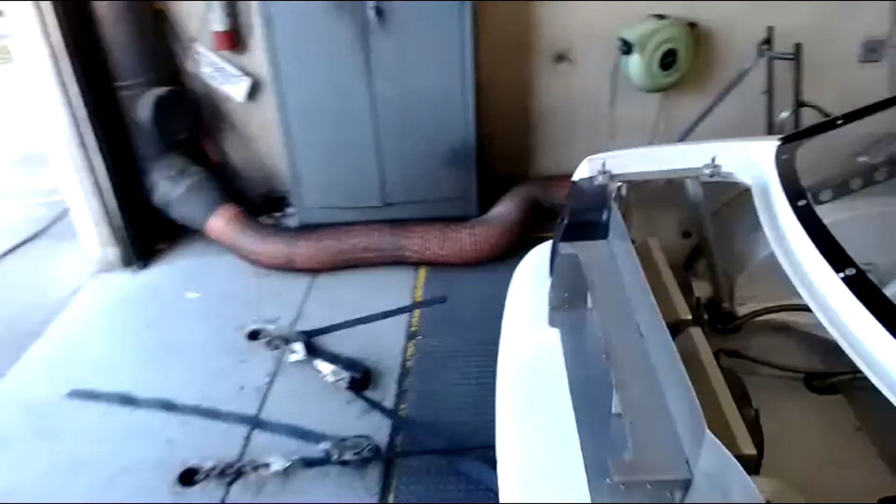Yeah, Ish throwing the tune on her. So you guys can see... oh, I can't see, oh there we go. Can you see there? Was I in your way? That's how it always is.

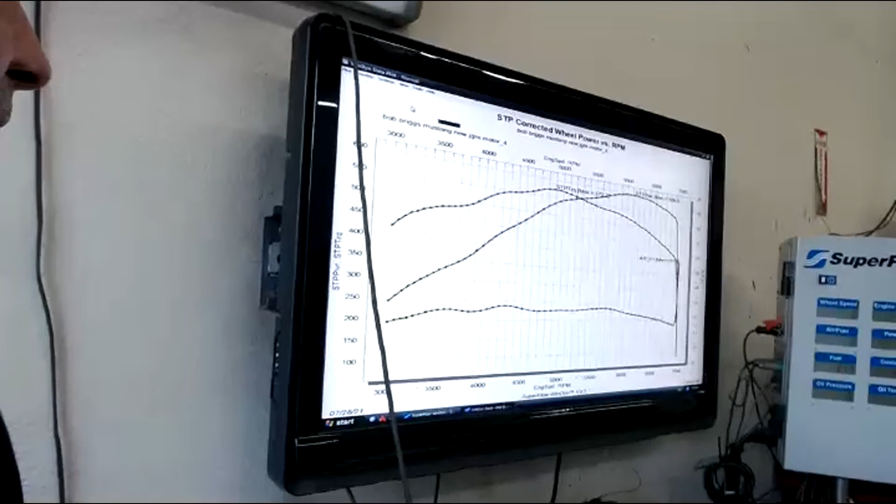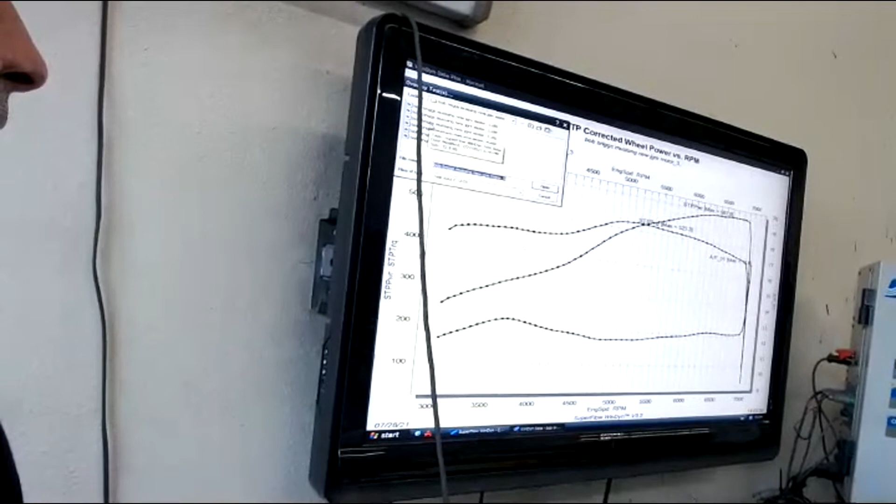This is with the short runner. And the long one. Oh no, sorry, it's a little more of a difference than that, huh? Alright, short runner versus long runner. There we go. Okay, now you guys can take a look at it, see.

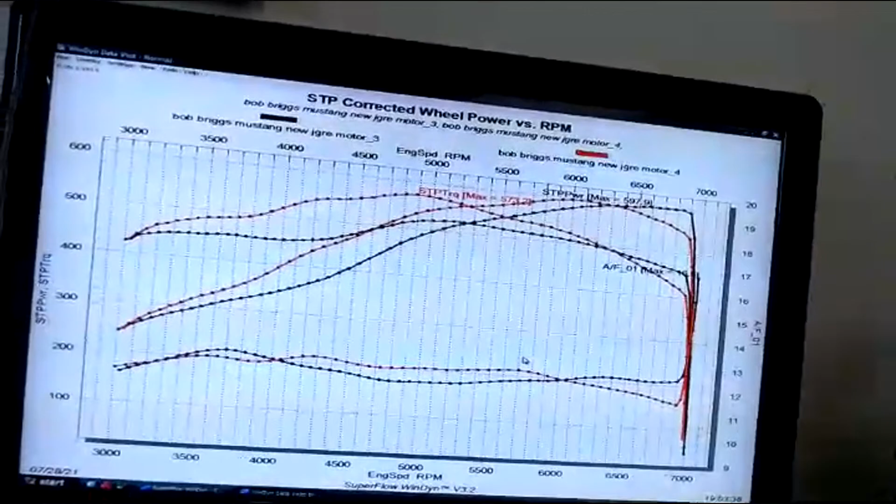So the red is the long runner, the one that's making an awful lot more torque, all the way out to, as you can see, all the way out to 6,500.

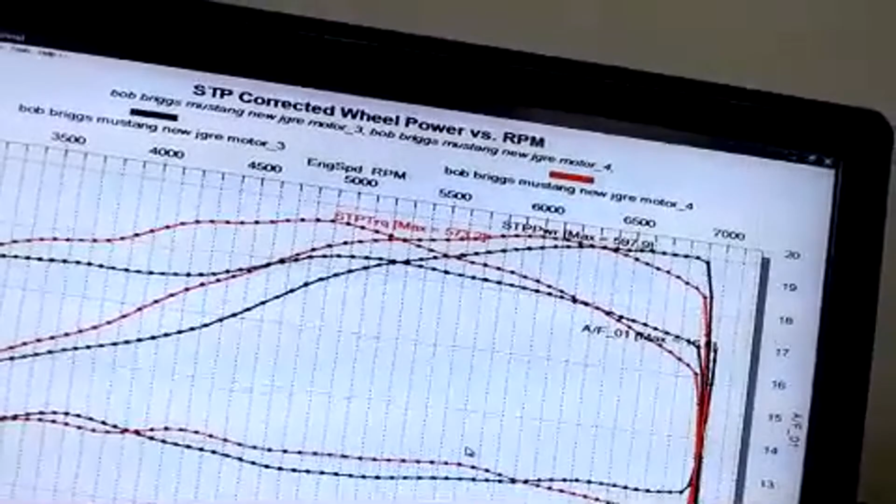The short runner did make more power from about 6,400 or so on out to 7,000, but the peak was really not changed that much. They were within 1 or 2 horsepower on the peak. It's just that as the long runner started falling off out to 6,900 or so, the other one continued.

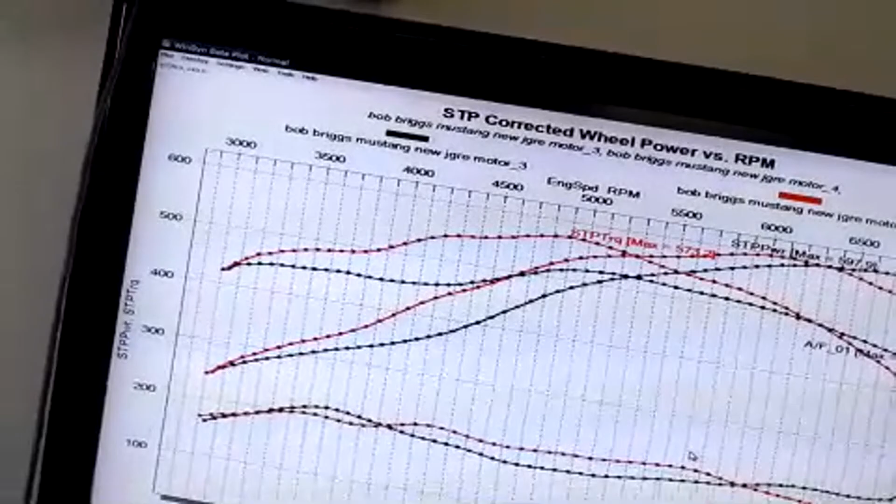But look at the trade-off. This is kind of what you'll see if you take a look at any of the videos I have up where we've run this FAST manifold with the adjustable runners on it. The long runner versus the short runner, it's really hard to beat that runner length up to 6,500 RPM.

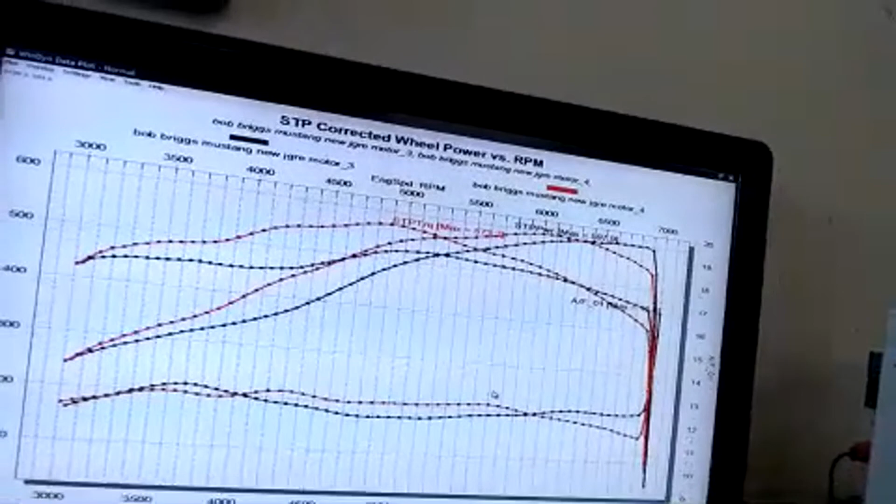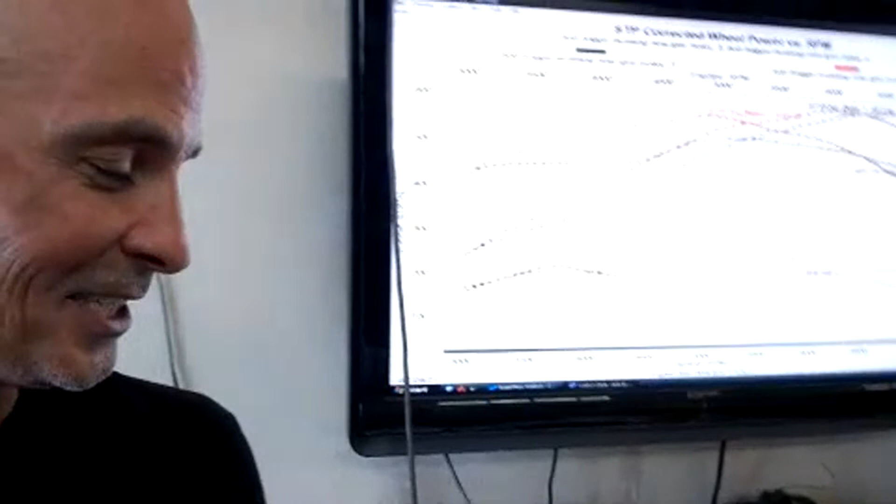And then the question always is, okay, you ran the long runner, you ran the short runner, but what about the mid-length runner, which they do have? That's the blue runner for the FAST. What about the mid-length runner? That's going to be the good one, allowing us to have all the top-end power of the short runner and all the bottom end of the long runner, except it doesn't do that. What it does, as you might imagine, is be right in between those two everywhere, all the way up to the top.

So it would have a little bit - thanks Ish. You doing more tuning? Maybe a little tweak just to get the air-fuel nice and straight. Yeah, otherwise good. Nice, it sounds good.

Sounds clean, man. So as I was saying, the mid-length runner just puts everything kind of right in the middle of those two things. It's not the magic one. It doesn't add a whole bunch more, it doesn't take away. It's the long runner, like I said, and we've shown this - if you take a look at the LS3 intake manifold video that I have up, it's really hard to beat the factory LS3 manifold.

It has the right runner length for that combination, and it makes really good power. You can make more peak power at the top with some of the short runner stuff, like a Super Victor or something like that. But as always, the trade-off in power on the short runner stuff is that you lose a lot of low-speed power. So most guys, especially if you're in a street car, on a drag race car that you're going to 8,000, maybe the short runner manifold is a really good way to go. But for most applications, having all that extra torque - in the case of this test on the chassis dyno and also on the engine dyno when we did that, you're looking at about 50 foot-pounds of torque. Nobody I know wants to give up 50 foot-pounds of torque.

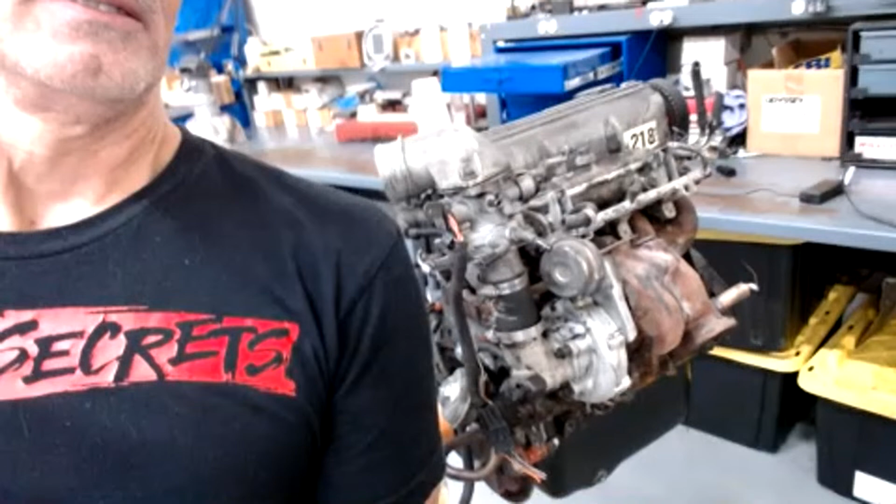Check it out - yeah, OG IROC, 5-liter tuned port motor. That's when they made Camaros had real power, and they had tuned port motors in them. Big throaty turbo on that one.

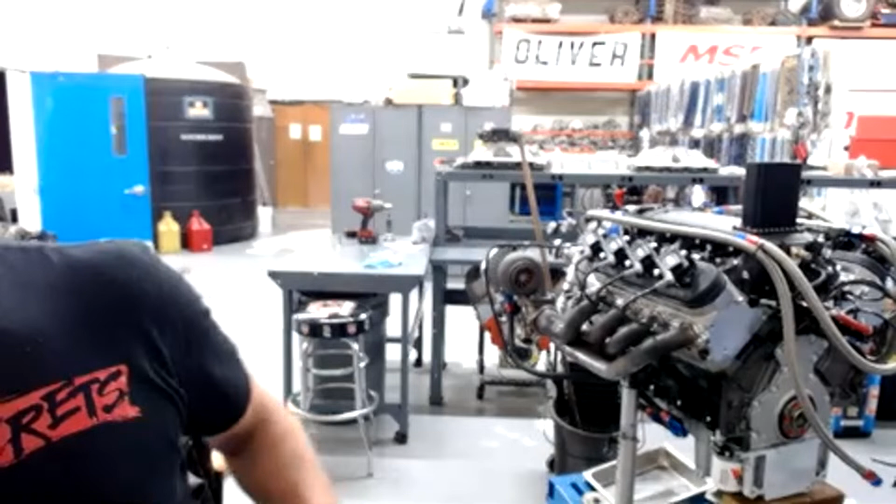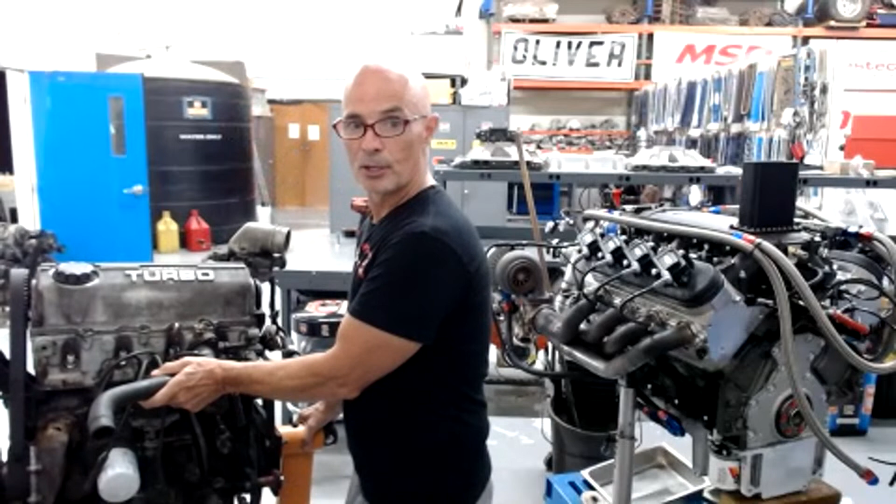So the announcement for tonight is that we kind of want to see this turbo motor in the background. I mean, I like the fact that the valve cover at least says turbo on it. Back this on, this thing up. Yeah, back it up, Buttercup.

So the announcement for tonight is I think I found a Dodge Omni GLH turbo. A complete car, not just a motor, not just a leftover 84 600 that nobody cared about. An actual Dodge Omni GLH turbo. And not only that, it's actually an original owner car. So that's very, very cool.

Now, I did make him a promise, and I would always keep that promise, that if he wants to buy the car back because he's the original owner, I'll sell him the car back, because I know how important that is. I'm an original owner of my 5-liter Mustang, and it's a car that I don't want to get rid of unless it goes to my son, perhaps. But otherwise, I can understand wanting to keep that and how important it is. So if he comes back to me later on and says, hey, look, I really got to have that car, I told him, dude, I completely understand, and I had lots of fun with it, and now it's your turn to go back and do the things you want to do, so it's all awesome.

I'm hoping tomorrow to go pick that up, and I'll do a video on that, and we'll do a walk around and talk about it, because it's not even a stock one, it's got some cool stuff on it. We'll be able to talk about everything going on there, and I'll be able to use that for some very cool chassis dyno stuff, along with this up on the engine dyno as soon as I can find a bell housing for it and fix a couple of the issues.

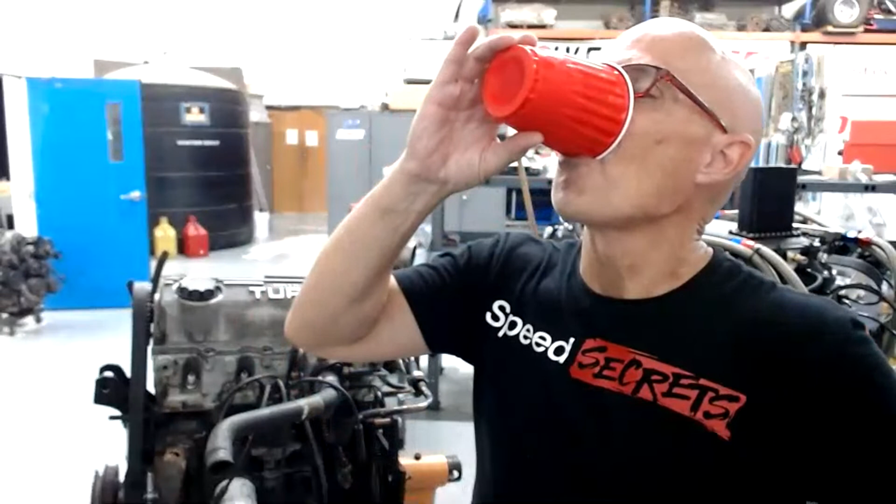Do you think the billet wheel is going to show something over a cast wheel? I really wish I could do that test. What people want is a billet wheel that's exactly the same as a cast wheel, and that's really hard to do. So it's hard to tell how much of the billet goodness is real, because normally when they make a billet wheel they also change the design. If you change the design, the change in response rate could have come from the design and not just the material.

In the summer, with hot air going into the air-to-air, it won't do much—but even with 100-degree air cooling a charge temperature that's 200 or 250 degrees, it still brings the temperature way down. It's better than not having it, obviously. If you can cool it with 30-degree air though, it's even better.

Anyone have an OEM RX-7 FC intercooler selling for real cheap? Reapers in the house.

Yeah, the 2.2 is actually a Chrysler developed motor.